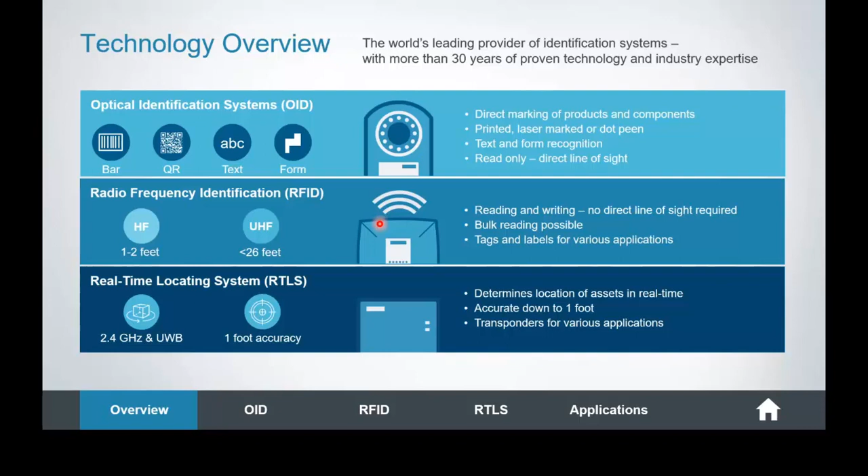And our new business that we'll talk more about tomorrow, we're going to do a separate session for this, is our RTLS business. So we have a real-time locating systems that we'll talk to you in a bit more detail tomorrow. But for today, let's dive into OID to start with.

So OID, we manufacture smart cameras. Okay, so our optical identification business is our smart cameras, which are out the box from the factory, predominantly barcode readers that would read linear barcodes right the way through to data matrix barcodes, to QR barcodes. Not only can we read black on white, high contrast printed codes on labels, but we also have the ability

to do DPM, so what we call direct part marking. So whether the component is laser etched or dot peened or chemi etched, whatever inkjet, whatever sort of marking method to obviously put a barcode down onto on a product, we have the ability to decode it straight from the MV500.

We have some software plugins which turns the reader into more than just a code reader. We have the option to do OCR, so some optical character recognition, and we have the option to do simplistic vision that we'll come on to talk about in a second.

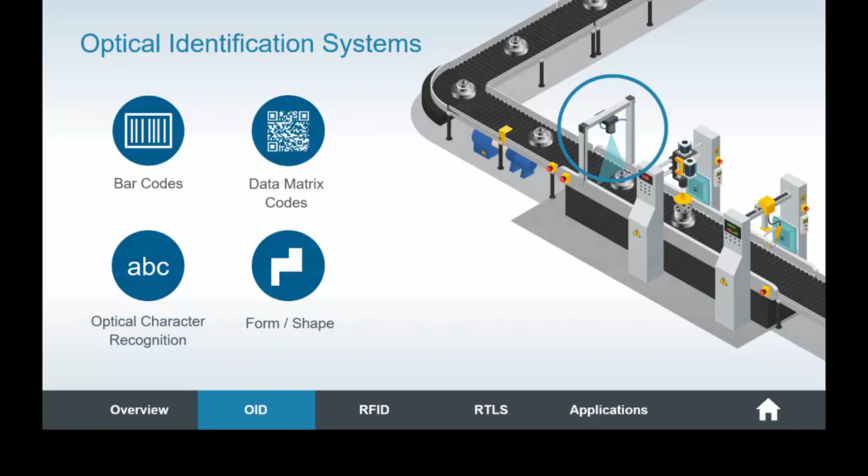So what are our software add-ons? So our software add-ons is Location Light, which is new. So this has been released this month. So we'll talk in a bit more detail about this, which comes now as part of the MV500 product. So at the factory, you get Location Light as well as a code reader, and it's our sort of entry-level simple object recognition that we'll show you a little bit more later.

Then we can obviously have a software license upgrade, so we can upgrade the camera to do Pat Genius, which is a full license for vision systems, for detection, positioning, counting, presence, absence, some what we call simplistic vision tasks. So I have to point out that we don't manufacture in-depth PC-based vision. You know, all of our vision systems are around the smart camera portfolio.

We have another software which is our Text Genius license. So this enables us to read black on white, high printed OCR on labels. This could be OCR A, OCR B fonts, black and white printed. We also have our Text Genius Plus license, which gives us the ability to train different fonts and special characters to potentially read inkjet codes on best before dates on pharma packaging, food and beverage packaging, etc. So different ways to print the code.

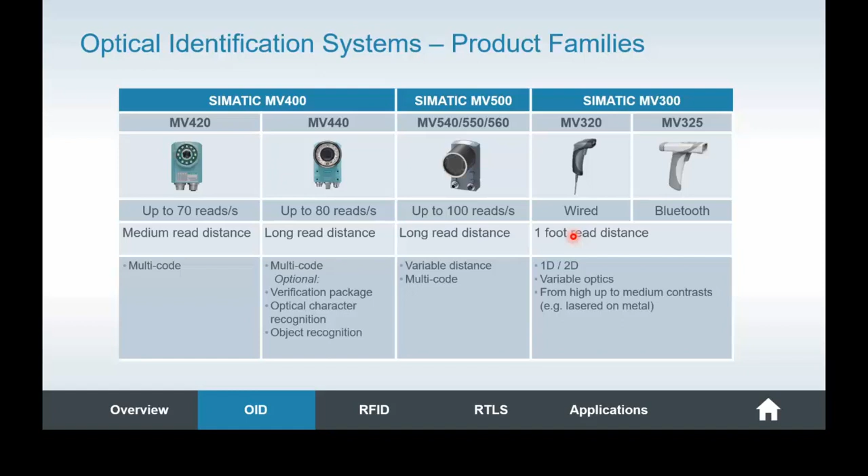We have an SD card in there for parameter saving, and we also have an easy setup button at the top, which enables you literally to plug the camera in, press the setup button on the top, and it will automatically set the camera up for the correct focus, the correct lighting, and you're up within seconds to start reading barcodes. You'll find that it's probably about 3 times the speed of what the 440 is. So it enables us to do high speed code reading in some logistics applications.

Our RFID business, our radio frequency identification business - quick, how does it work? Within RFID, we manufacture, like I said, 2 types, HF and UHF. They are passive RFID, so there's no battery involved. A quick explanation of how that works: we have a reader that literally sends energy out, the tag sees that, the tag gets quite excited, powers the tag, and then it sends its data back wirelessly to the reader. And we have multiple products for that.

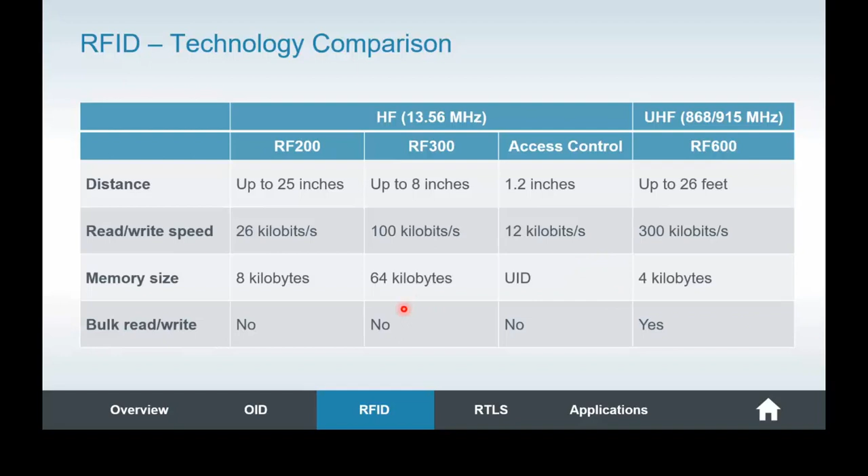The two products that we produce are 13.56 megahertz in the high frequency bandwidth and 868-915 megahertz in the UHF bandwidth. Some people may know we have our RF200 range, which is our entry level HF, which you would see again on automotive powertrains. We have our RF300, and we have our access control reader, which is our log-on reader. And obviously the UHF product is what we call our RF600. Again, some similar distinctions between the two: predominantly short read range on the HF to long read range on the 600. Lots of data in the tag within HF, not so much data in the tag of the 600. But again, multiple tags with RF600, predominantly one at a time on the HF portfolio.

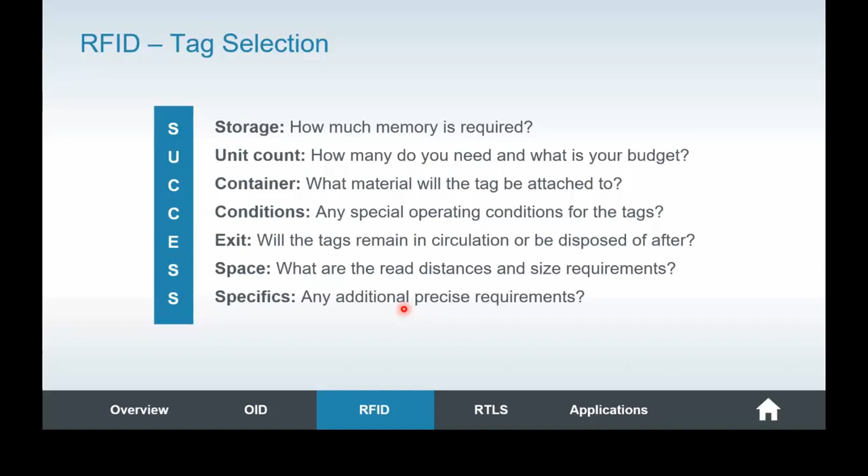If we answer these 7 questions, that would put us in a good position to spec the right RFID transponder, and give us a way of moving forward with a particular application.

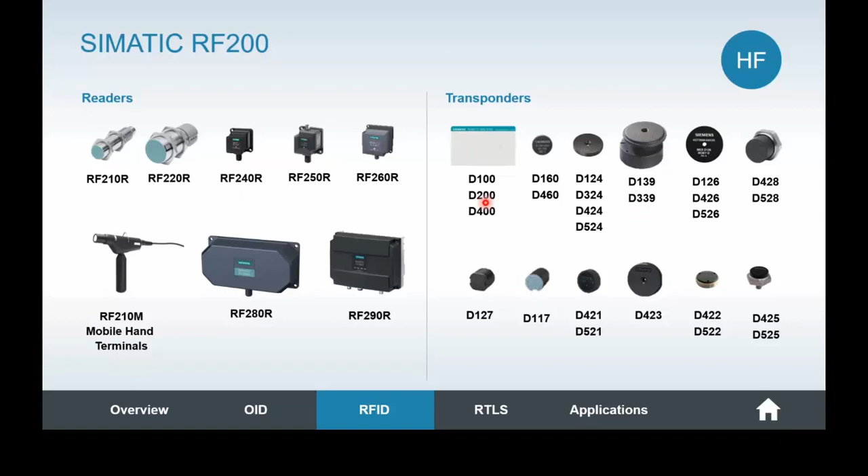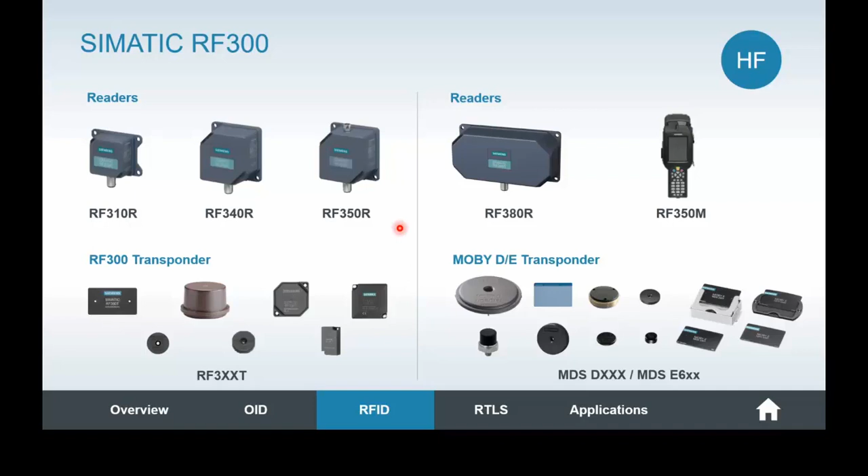On our RF300 range, again very similar, but you'll see we have a dedicated handheld for the RF300 readers. You'll see some different tags too - this is our high temperature tag for paint shops. There are some different compact readers, and for people who know the SIMATIC portfolio from years gone by, this is also known as our MOBY D or MOBY E transponders, still seen in the field today. That's our RF300 range.

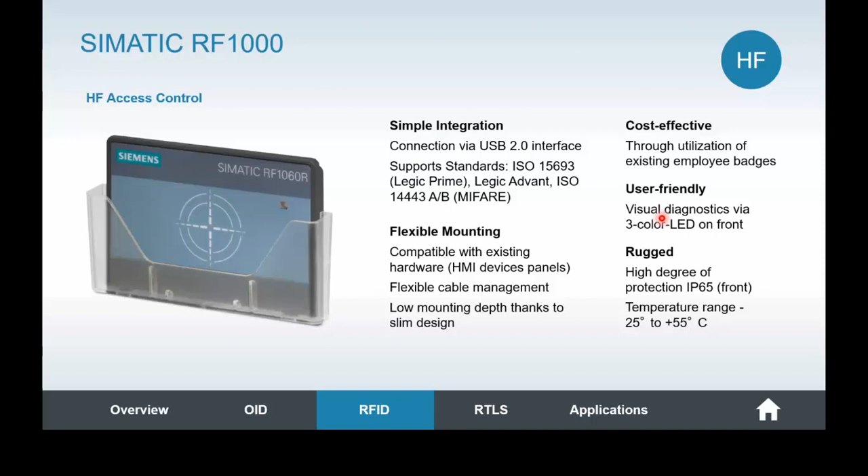So it's quite good in terms of customers could still have their existing employee badge that gets them onto site. They can use that card to log on to the HMI. I know there's some security issues now where people know each other's passwords, so it's a good option to use their existing employee card to log on to the HMI rather than needing to type in passwords.

So that's how the RF1000, an entry-level scanner, handles HMI log on access control. I'll turn over to Fergus now. Fergus will talk to us about how our ident products interface with our TIA portals and PLCs. So over to you, Fergus, on the TIA side.

Thanks very much, Lee. So yes, essentially integrating into TIA portal is obviously a massive priority for Siemens, getting everything into our totally integrated automation portal. And ident is no exception. It's actually been integrated into our control systems for a long time using a block called the ident profile block. But we now have a number of different wrappers for that block which make that interface far easier. We're going to show this in the demo.

Some of the devices can connect directly onto Profinet. So the RF600, for example, goes straight onto Profinet - drop it into your hardware configuration. There's an ident technology object which provides the interface for that reader, and then you can start communicating with it using some pre-built blocks. Some of the other devices, the cameras as well by the way, are straight onto Profinet too. Some of the other RFID readers have to go through a communications module. There's an absolute plethora of options for this depending on what sort of I/O you're using.

So we've got ET200 on the left. We've got our distributed ET200S or SP, ET200 Pro, which is more distributed and IP rated. We've got the S7-1200 form factor. On the right hand side we've got the RF160C, ASM456 if you want to go onto Profibus. All sorts of options for connecting into a TIA portal environment and interfacing with our controllers. And like I say, we'll go into a demo of that shortly.

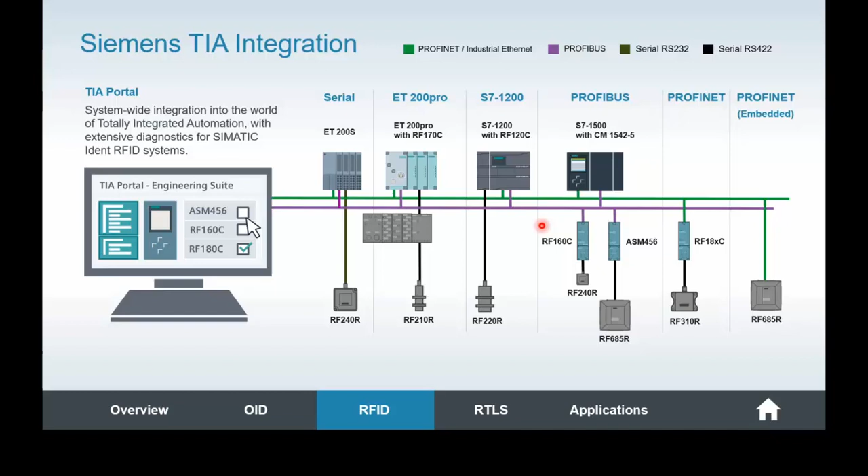Okay, cool. Thanks, Fergus. There you go. You sort of knew it was coming. I told you it was shortly. Yeah.

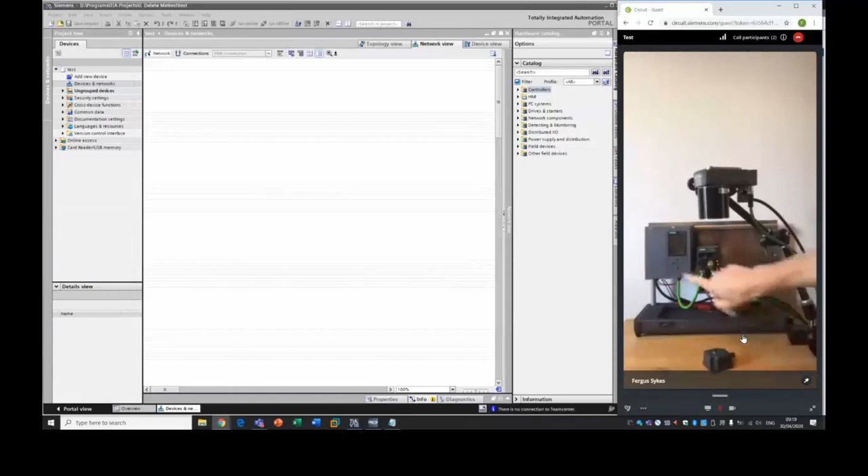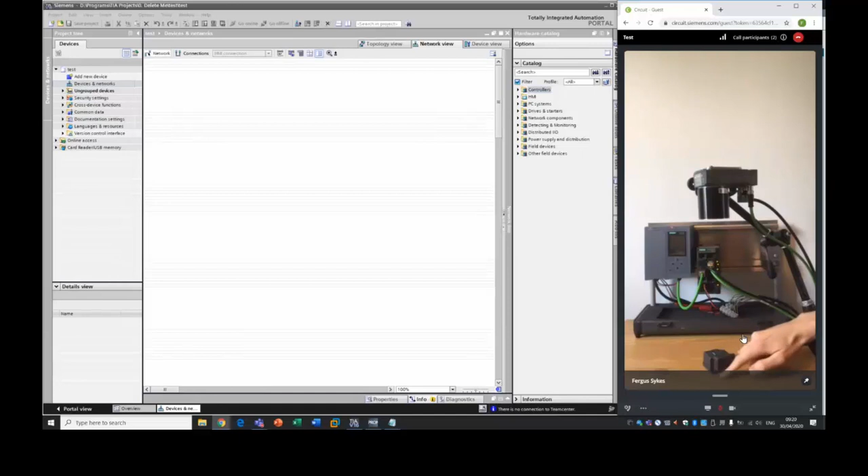So what we're going to do here today is connect our 1500 up to our MV500. So this is a 560U in this case. It's not required necessarily for this application, the U is a fairly high spec one - it's just I couldn't bring one of every single camera back to my home office, otherwise my girlfriend would be a little bit upset with all the boxes. We've also got a little RFID reader down at the bottom here, which we're going to be looking at with our camera, identifying the screw holes and passing the coordinates of those screw holes into our 1500.

So I will just spin back round. Okay, let's add in our 1500. I'm going to pick an unspecified CPU in this case and do the detect, because I can't remember the exact part number of my CPU, and why bother going to the effort if the software can do it for me. That's the power of integrated software systems, I guess.

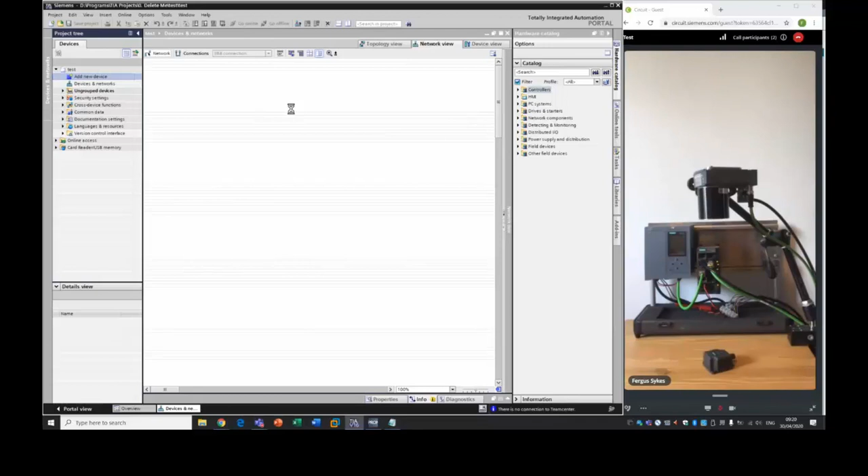Here we go, so this loads up. I'll do detect. Fingers crossed - I have tested this multiple times over the last couple of days, but you never know with live demos. Start search. Found our device. I'm just going to detect that 1500 and bring it into the project.

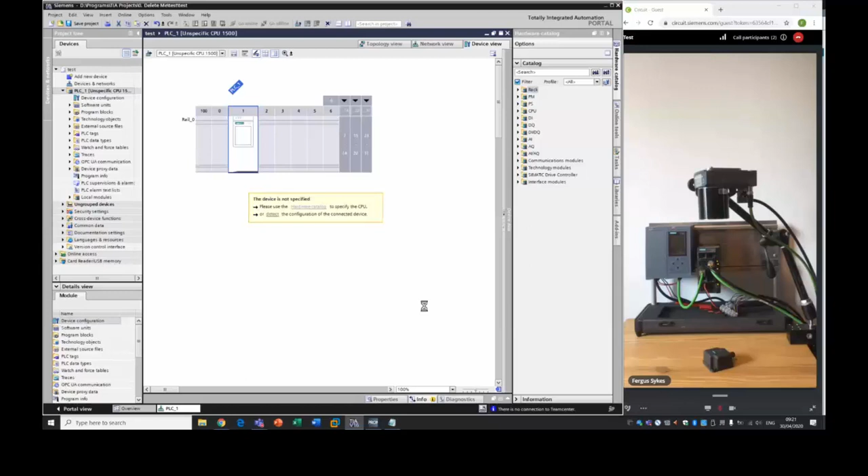You can also do this with I/O, for example like ET200SP racks, using the hardware detection. But for our camera, I'm going to go into detecting and monitoring in the hardware catalog and our Simatic optical identification systems.

You can see there we've got a representative for each of the families, and I'm going to drop in my MV500 here. Currently there's no firmware differences available. There is actually a firmware release that updates for the locator light, which we're going to be looking at, which is a no-cost option, but this older firmware version GSD file is going to work just fine for us for the moment.

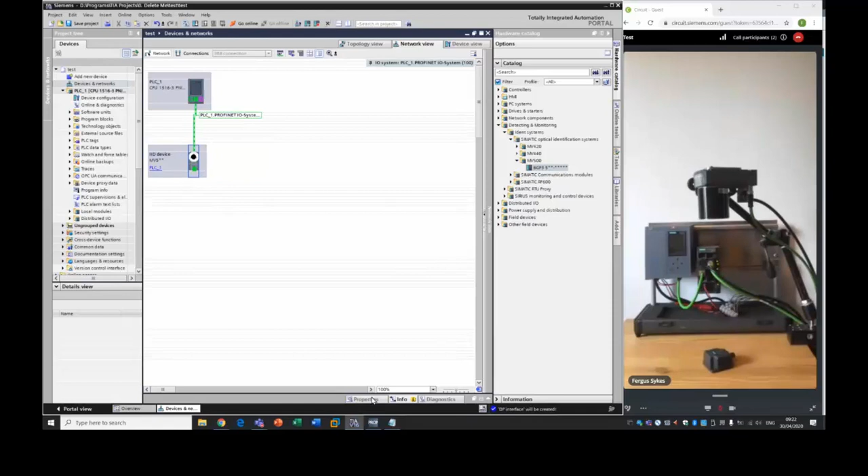So I'm just going to go into the properties quickly. There's a few different options in here, but the only one I'm really concerned with is this operating mode. So FB79 and ident profile are two different ways of communicating with the camera. We don't really need to go into the depth, but for the technology object, which I would always advise you use if you're just doing a simple quick setup, we want the ident profile.

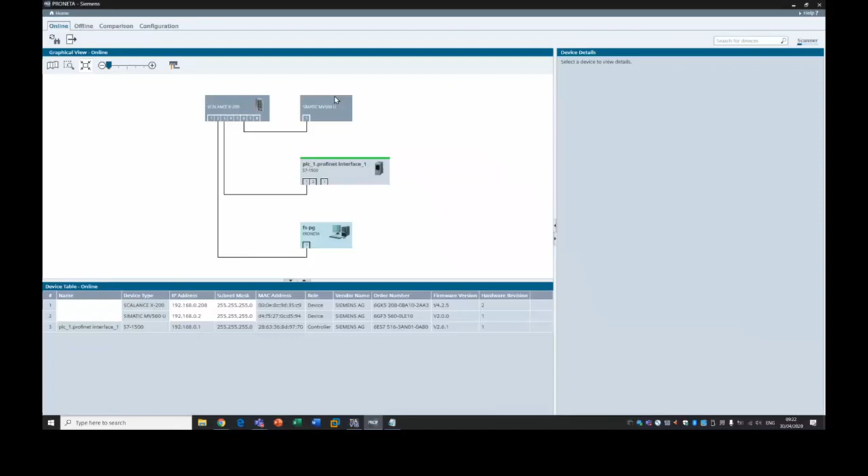My IP address here is going to be 0.2, and the IP of my controller is 0.1, which I have already preset with PRONETA ahead of time, just to speed that up a little bit. But what I do need to just do is assign my device name.

Apologies if I'm going a little bit quickly. I just want to make sure that we get everything into this demo, and we don't want to keep you here for too long. I'm sure everybody needs to go and tend to children and dogs and things like that.

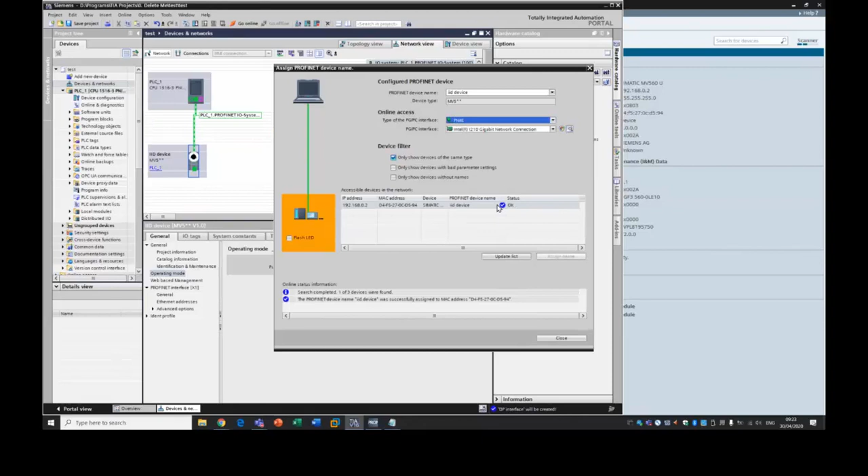So I'll just assign the device name. There we go. And I'm just going to download the hardware configuration to the controller for now, so that once we've got that hardware downloaded, it can go out looking on its Profinet network, find the device name that we've just assigned, and connect up with the MV500.

And we've got more stable lights now on our 1500. I'll just finish loading that. Let's turn the screen back on. There we go, downloading process. And let's start the module. And there you go, we've got a nice green banner.

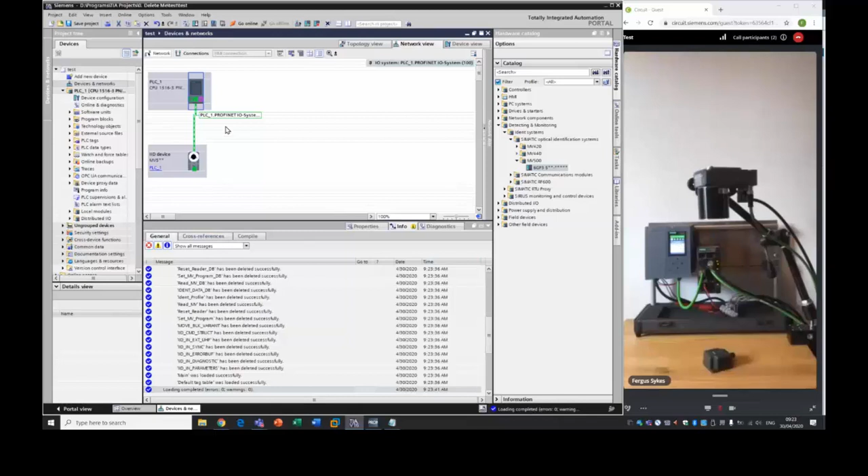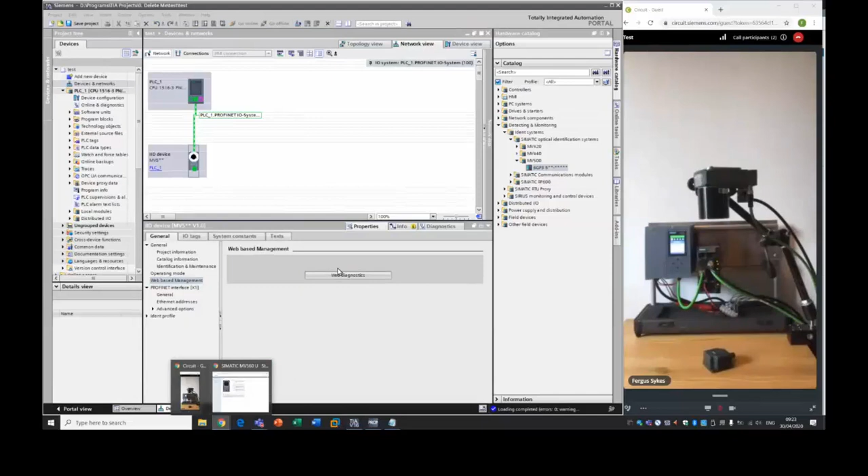Okay, so what we're now going to go into is the camera software. We can do that from here. We can just type in an IP address into any web browser. This is essentially a link for the web browser, the IP address that we've specified, and that will bring you to this page. So I've already loaded this up prior, so there you go, there's our IP address up there.

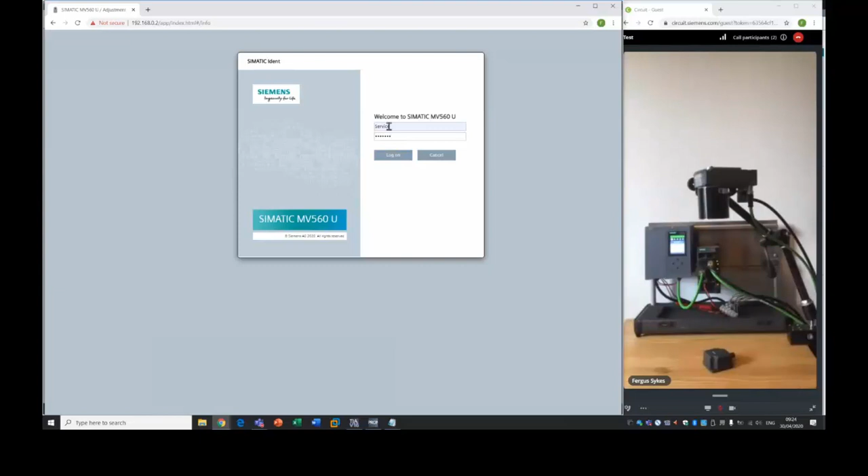To go into the main home page, I'm going to click on our camera, and I'm going to log on. As with everything in the world that we currently live in, security is a priority. The default password, I'm going to log in with service, is just service, but you can of course change all of that, and if you log in with admin, you will be forced to change the password to increase that security.

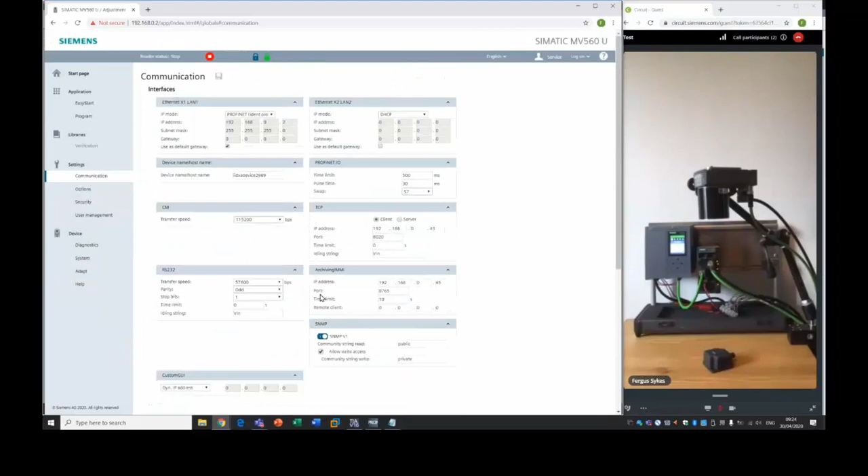First thing that we're going to do here, if we go to communication, you can see we've got Profinet ident profile selected up there, and I'm just going to change our trigger source to Profinet IO so that we're looking for a Profinet trigger, and then all of our results are also going to be via Profinet IO. I'm going to save that up here. There's all sorts of different options for communication, as you can see. We're not going to go into everything today, we just don't have time, unfortunately.

But you want to see the interesting bit. Now, apologies if anybody's sensitive to flashing lights, but this on the right-hand side will be flashing a little bit while I'm on the auto trigger mode. So, takes us to this screen.

We've got a basic program input into here. The first step of which is always image acquisition. Then we've got a decoder step, which we don't actually need in this case because we're going to do location. And then we've got our result, which is the output.

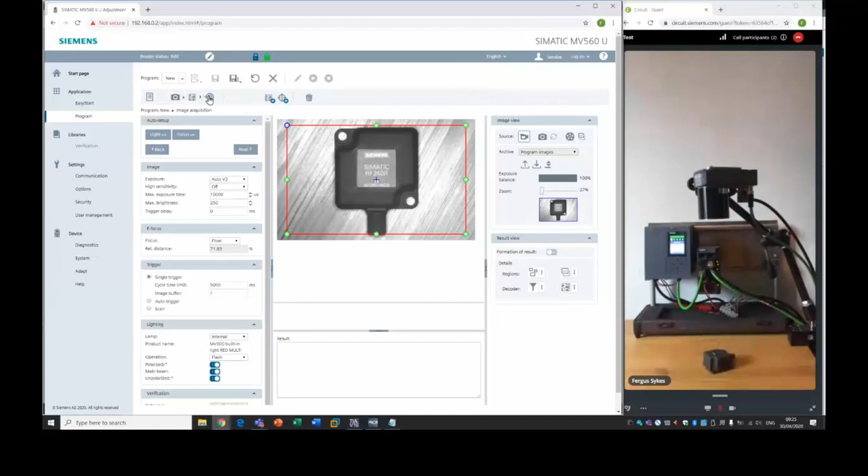So for now, I'm going to just remove that decoder step, drag it to the bin, and I'm going to drag in a locator step to the middle. The reason that these are drag and droppable is because you can have multiple steps of different types. So you can use, for example, a locator step to find a label within an image and then decode on that label, which could result in reduced decode times compared to just scanning an entire image for barcodes. Or you could have multiple locator steps if you wanted to, multiple decode steps, whatever you'd like to do.

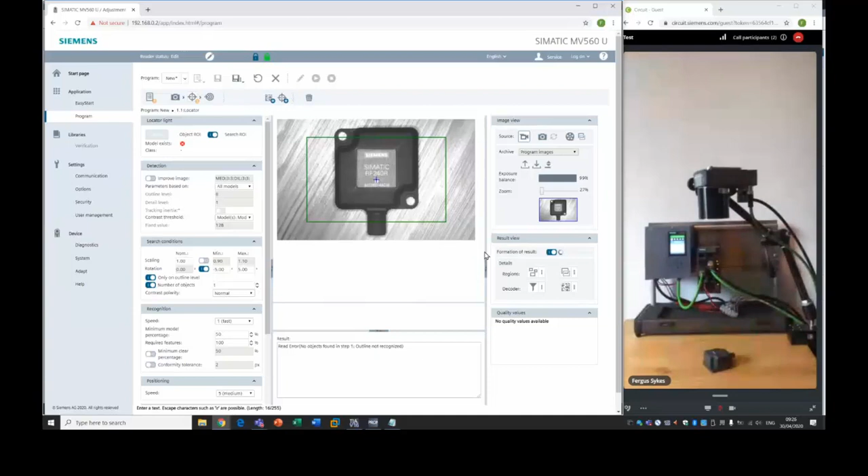So what are we going to do? In this step, our objective, I'm just going to zoom in here a little bit, is to find, as you can see on our Simatic RF240R that we have here, we want to find these screw holes.

So what I'm going to do first is create a model. We flick this over to Object ROI, and we get this little box here. Wherever you see this box in any of these screens, it's known as an ROI, or region of interest.

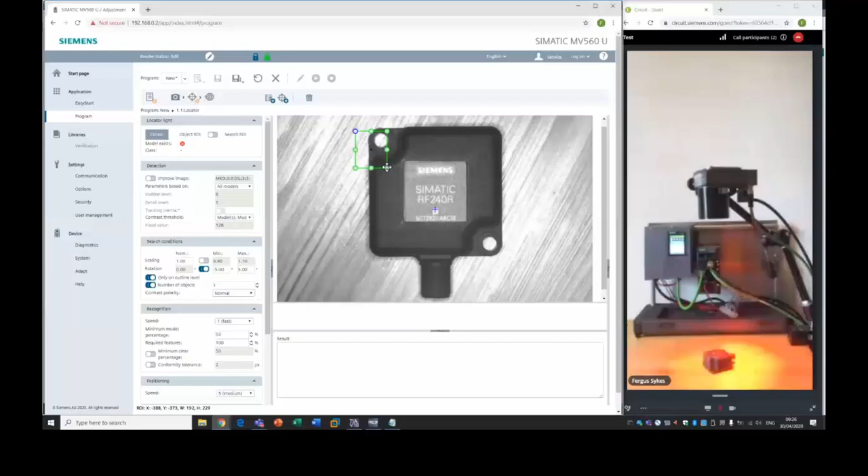Now, the region of interest can be increased or decreased. If you're doing something like code reading, you could have it as the entire screen, but if you left it as the entire screen, you'd probably end up taking far too long to find your code. Generally speaking, you want to adjust it as narrow as you can so that the camera doesn't have to look at every single pixel on the screen.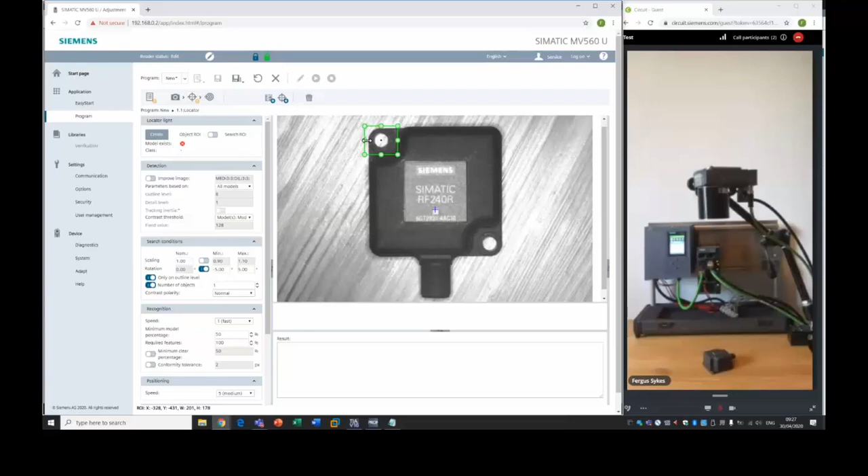And I'm going to be looking for this little screw hole up here. I'm going to try and get that dot as central as possible. There we go, that'll do. So I'll just bring this in actually a little bit.

That looks pretty good to our human eyes, but what we can see in the background here, this is on a wooden table, and we've got a lot of interference in the background. Lots of different lines, lots of different edges, effectively, of contrast difference, which is what the camera's looking at. And the more complicated the image, the longer it'll take and the more tricky it'll be for the camera.

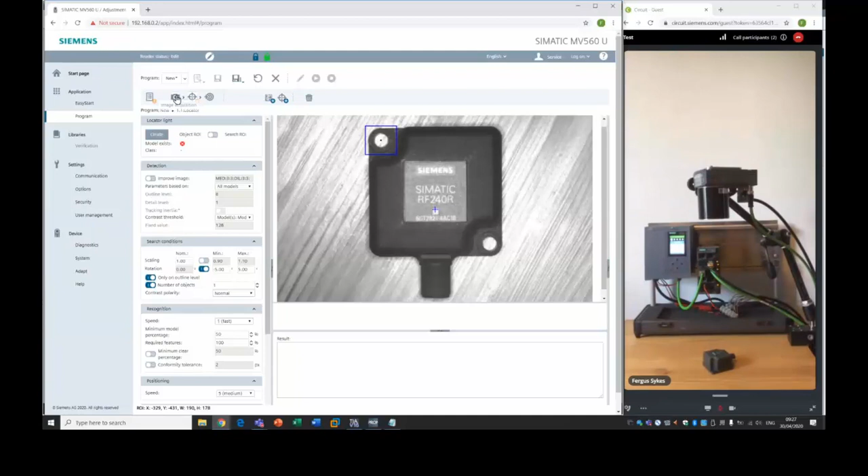So what we're going to do, first of all, is go into our image acquisition and play around with our capture. So at the moment, we've got the exposure on auto. Every time it takes a picture, it's actually taking multiple pictures and adjusting the exposure time and brightness accordingly. We're actually going to put it in manual for the moment.

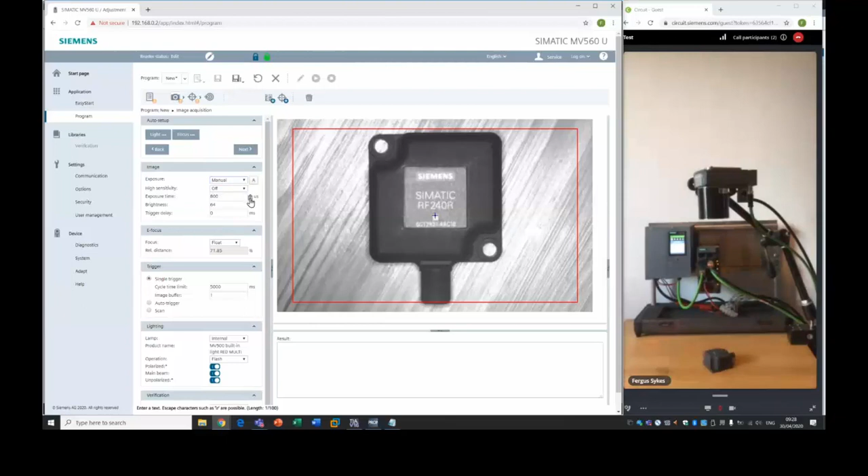And it's just taken the details from the last image that it took. We can adjust this as we please. So you can see if I turn the exposure time down, we start to get darker. Exposure time is literally the amount of time that the sensor is exposed to light. So the longer it's exposed, the more light it absorbs.

And I happen to know that 1800 is a good value for this, along with 100 for our brightness, which is sort of an artificial gain value in a way. Now this image looks really blown out. To our human eye that looks rubbish, but actually from the camera's point of view, all it's interested in is these objects up here, and now we have a nice crisp edge against a plain white background, much easier to find.

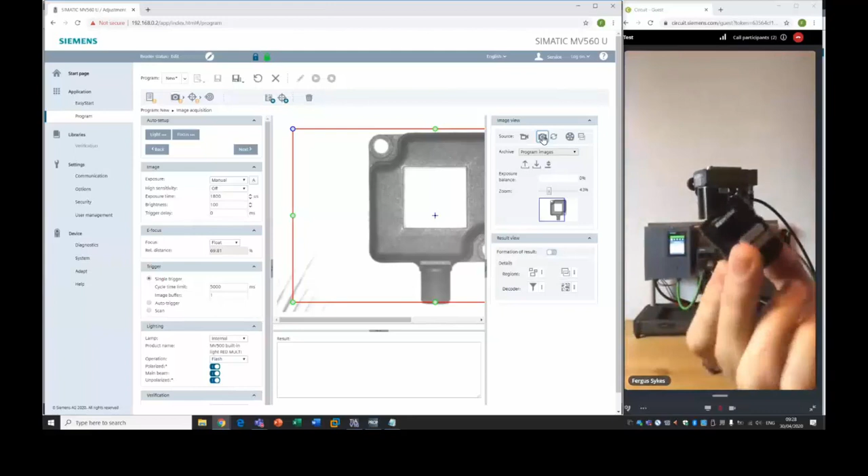What we have down here as well, you can see, is our e-focus. So I'll just stop this flashing for a moment and show you something quickly. So in front of the camera now, you should see we have a little lens. This is one of our fixed lenses that could be on this camera. Normally you would adjust your focus with this ring on the end and your aperture with this ring lower down. We don't have to do that in this case because we have an e-focus lens.

So if you look at the image that we have here, I'll actually just put this back onto auto so that you can see the text. And if I go into manual, I just need to put that back to trigger. So we can read this text at the moment. I can now change the focus with this value, and you see that changes there.

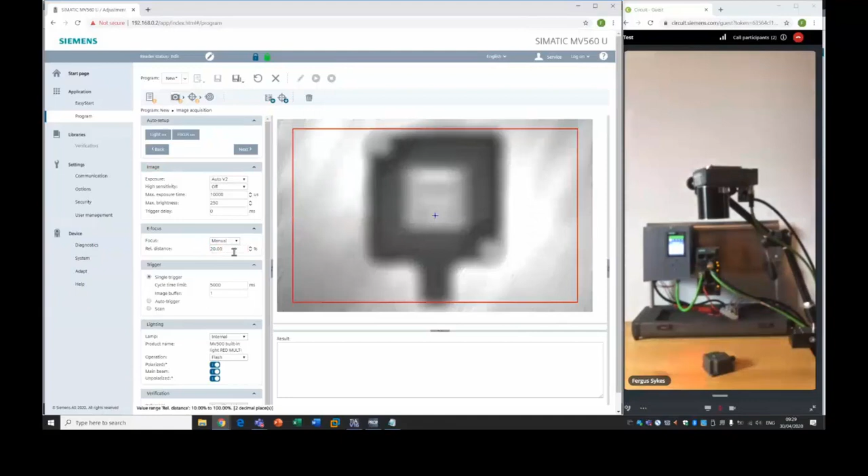I don't need to worry about that at the moment, and in fact for object recognition sometimes defocusing is actually better because it simplifies the image again, just like we've done with our exposure. But I'm just going to leave that as is for now.

The beauty of this, by the way, is that you can leave it set up with different focuses for different programs. So say you have different products coming down your line, which are different heights, for example. Those products could all be scanned, and when that program is loaded in, you can have up to 16 programs, I believe. Once that program's loaded in, the focus will be set appropriately for that object.

We also have lighting options down here. In this case, we just have a standard unpolarized light. But if we had a filter on the end of this, we could actually have a polarized beam, an unpolarized beam, and a main beam. And we can, again, select different lights for different capture stages. The camera can then dynamically adjust itself as we go through the program. Perhaps if we've got variable lighting conditions in the environment, we can adjust for that by taking multiple pictures with different lighting, different exposures, different focus.

Okay, sorry, just having a drink.

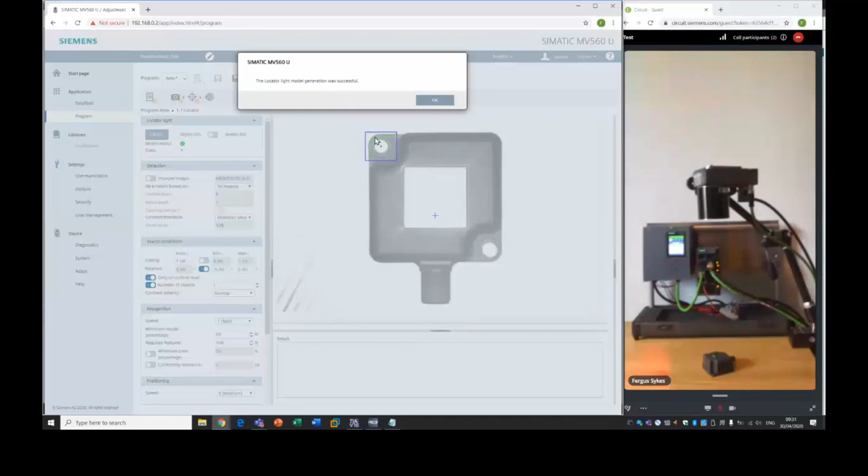Okay, so now that we've got a more simple image, let's create our model. You can see there we've highlighted those lines, so the locator has identified these edges and saved those as a model.

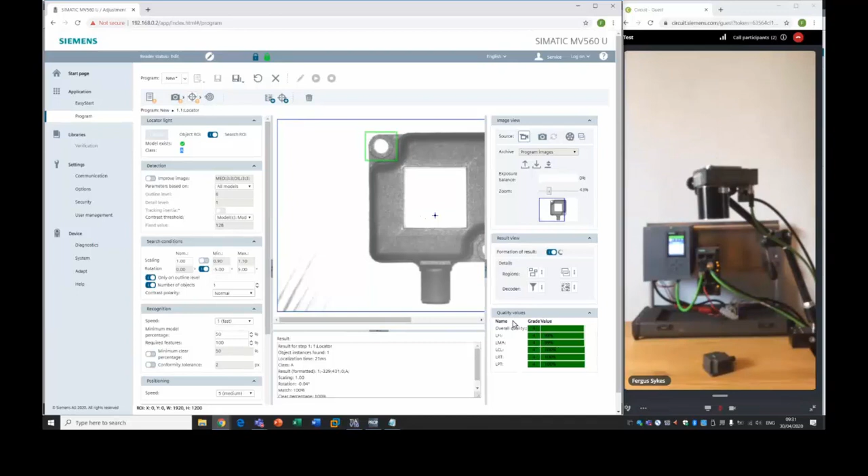I'm going to swap over to the search ROI now, and make this our entire screen. What I'm going to do straight away is run this. There we go, we've found that. So we're continually taking images at the moment, and we found our screw hole. You can see as I move this around, we can track it around the image.

What I'm now going to do is set this up so that we can find the other hole as well. So if we go for number of objects 2, I'm going to allow a little bit of scale difference from the object we trained it with. And of course, because it's upside down, we need to allow some rotation, in this case 360 degrees of rotation.

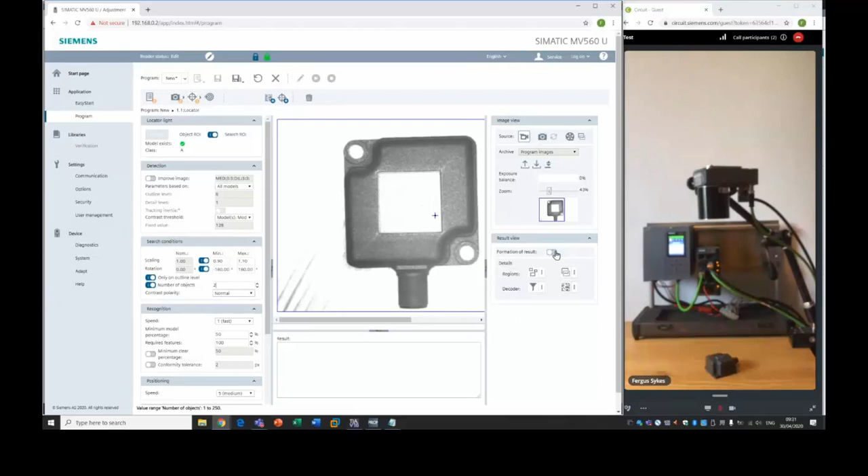If we now go back, there we go, we found both holes. So you can see, as we move around, we're tracking both of those screw holes, and we're actually getting the coordinates down here. Now this doesn't look like much at the moment, but all shall be explained.

So we have what we call the format text here. I'm just going to quickly format this a little bit. I won't go into too much detail because there's all sorts of things we can define here, but essentially this is the string that will be sent to our PLC. That's all you need to know — that's the string we're looking at that will actually be sent to the PLC.

And with all of these setups, by the way, in essence your PLC will always get an array of bytes, and then you can do with it as you please. That makes the interface much, much simpler. If you're connecting to a PC system, you can now also retrieve the images as well as diagnostics logs and things like that if you want them.

So for the format here, I'm just going to put some extra characters in that are going to make sure our format is always 4 digits long. I'm going to delete the rest of this bit, and I'm just going to add in some dividers. I'm going to call that Y, and I'm going to call this X. There we go — so you can now see in our format, we've got X 348, Y minus 351, X 271.

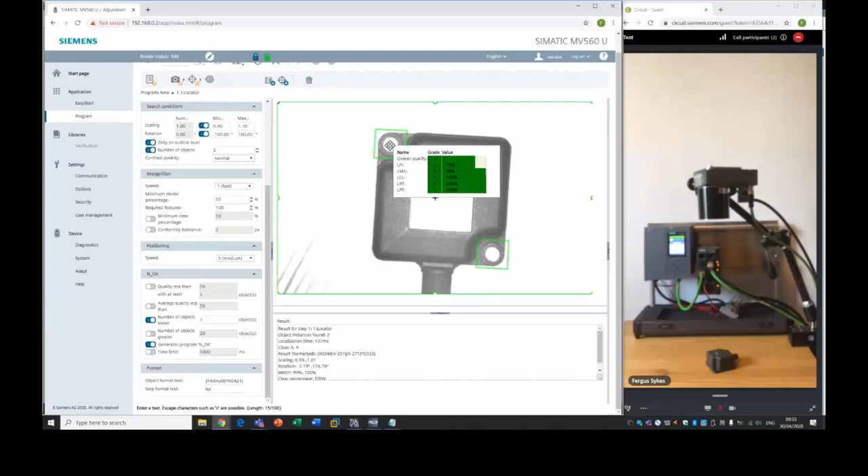And Y 333. Those values don't seem to make much sense really at the moment, but essentially those are in reference to our center point. So you can see the center point here, the black dot — the center point of our region of interest that we defined in the model, which is why I was so careful with getting that dot right in the center of our screw hole. That is the reference, that is what we're referencing to this center point.

So the coordinates are that central point of the model referenced against this center point, which is why some of them are negative. We do get some other information in here at the moment, but we're not too bothered about rotation because it's a hole — we don't really need to know what the rotation of it is. We just need to know there's 2 and we need to know where they are.

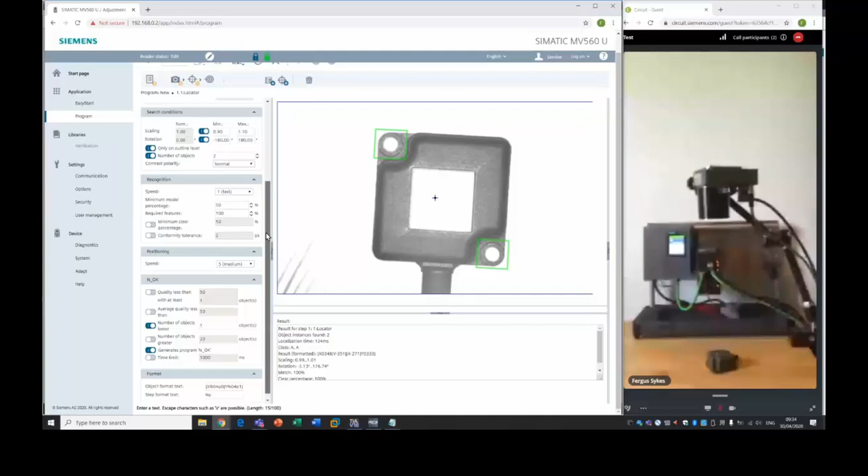So that's essentially it for our model. We've created that. We don't want to change anything in the results step at this moment in time, so we're just going to save our program. I will just save this as screw hole find. Save program.

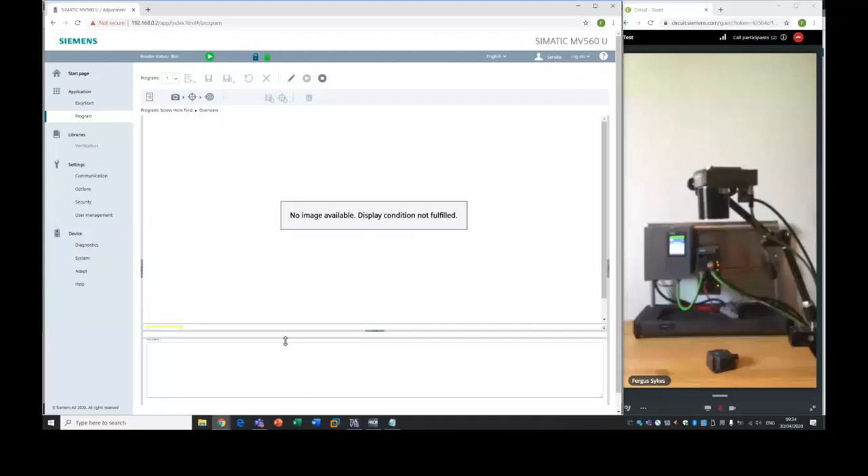Okay, and collapse that, and I'm going to go into play. So at the moment we're on single trigger mode, which is the default, so we haven't actually got anything to look at the moment. So I'm just going to log off now, and we're going to go back to TIA Portal.

So how do we actually control the camera? The technology objects that I was talking about before, here they are. So we've got motion control, which a lot of people will be familiar with, PID, counting and measurement. We also have SIMATIC Ident.

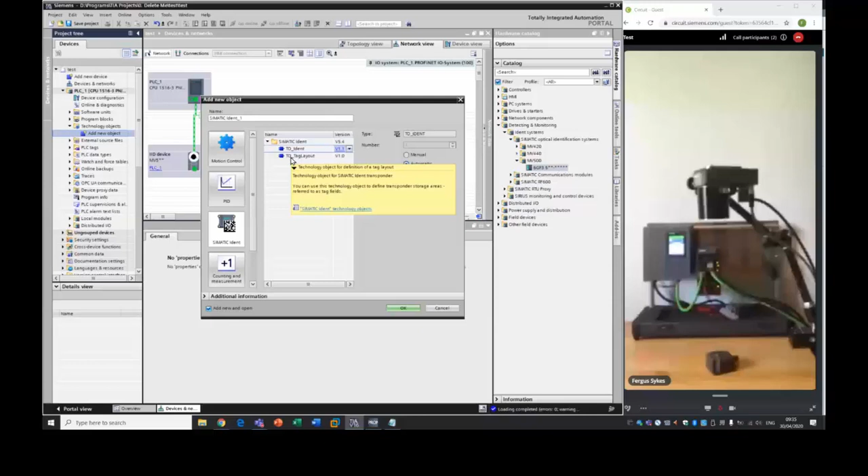TO tag layout is something that is still slightly in development, but this will provide essentially custom, easy to use tag layouts for putting user data onto RFID tags, which is a really nice feature. Just makes the data handling a lot easier. But we're just going to use TO_ident for connecting up our camera.

If I put one of these into our project, and as we do if we're selecting a drive in a motion object, we just go into our devices, distributed I/O, ident profile, and tick that. That's all there really is to do in this technology object. We can, if we like, define it so that when we issue a reset command, it always selects one of the programs. We're not going to do that for the moment. I'm just going to leave that as is and go straight into my main OB.

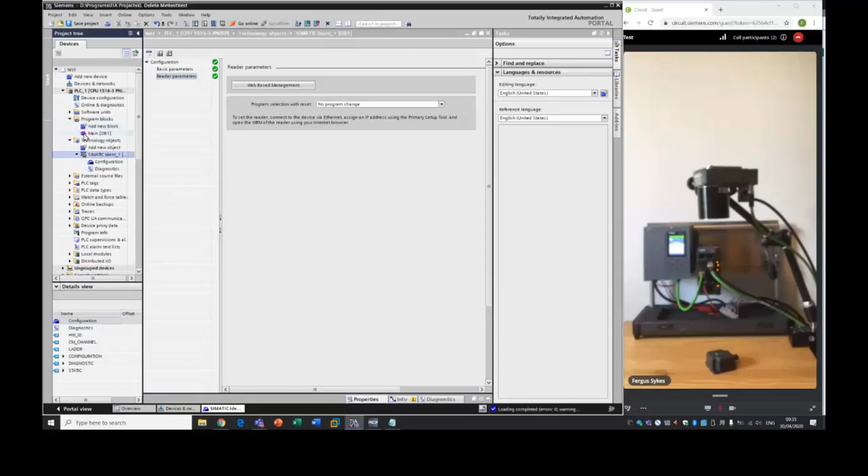So what are these blocks I've been talking about? If we go down into our optional packages, which is a lovely new folder we've got now with all sorts of goodies in there, we also have SIMATIC Ident. Now there's loads and loads of blocks in here depending on what objects you're using. So we've got RF600s, 300s, we've got camera stuff, advanced blocks. We don't need any of that in this instance.

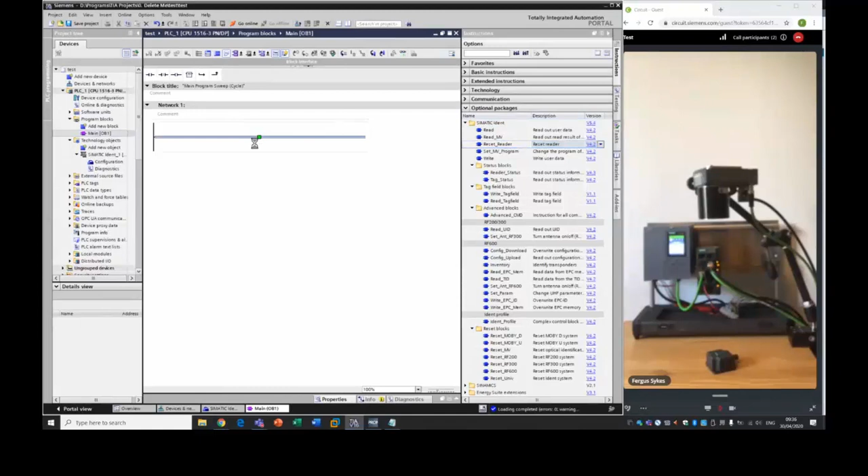All we're going to use is a reset reader, which, as it says in the name, is used for resetting, acknowledging faults, that sort of thing. We're going to get a set program, so this is how you'd choose which program within the camera that you want to run at any time. And we're going to get a read MV. Drop those in, I'll just minimize that.

Okay, we're then going to drop our SIMATIC Ident technology object onto our hardware connect pins. And it's as simple as that for addressing it. There's no more faffing around with hardware numbers, hardware IDs. We don't have to deal with the comms at all. It's as simple as that, dragging and dropping the technology object onto the block.

The only thing left now is to create a data block for our data to be stored in. So I'm going to create a new DB here. I'm by no means showing best programming practices, by the way. This is just a simple setup, so please don't judge my programming skills.

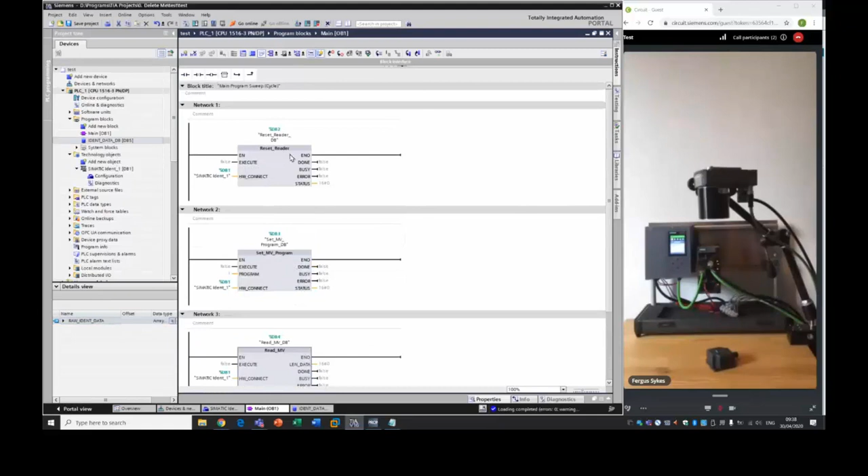I am going to create an array here for our data. Doesn't really matter how big it is, it just needs to be big enough for the data that's coming back. And as I said before, it's just an array of bytes. So there we go, we've got 500 bytes in our array. Come back into our program. I'm going to highlight our data block, and in the details view, I'm going to drag the array, not the data block, the whole array onto our ident data pin. And that is literally all we need to do to start getting data back from the camera.

Thanks very much, everyone. I said, no, obviously I'm going to actually show you it working. I'm not going to cop out there. I'm just going to pray that my live demo actually works. Here we go, let's download our program.

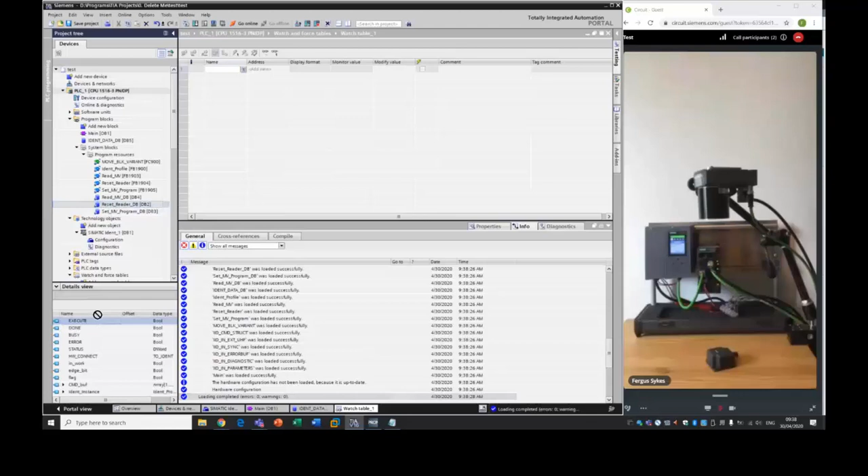And I've opened up a watch table here. I'm going to quickly drag in our executes. So if I go into program resources, reset reader, and we'll go execute and set MV, we want the execute for that as well. And read, I'll get the execute for that as well. Expand those out a little bit.

And then I'm going to use the split window function and open up our data block below so that we can see the data when it arrives. So let's go online. And you can see we've currently got nothing in our data block. And if we go online here, everything's happy and healthy. We're connected up, we just need to try and trigger the camera.

So I'm going to do a quick reset. I'm going to set our program as 1. And fingers crossed, there we go. We have data into our PLC straight away.

Now, I'm going to say that you're probably not going to believe me that this is actually the correct data, because that looks nothing like what we were actually looking at previously in the camera software. I'm just going to do a little bit of data manipulation using some code that I've written previously so that you don't have to watch me do it all. Excuse my little cheat sheet here.

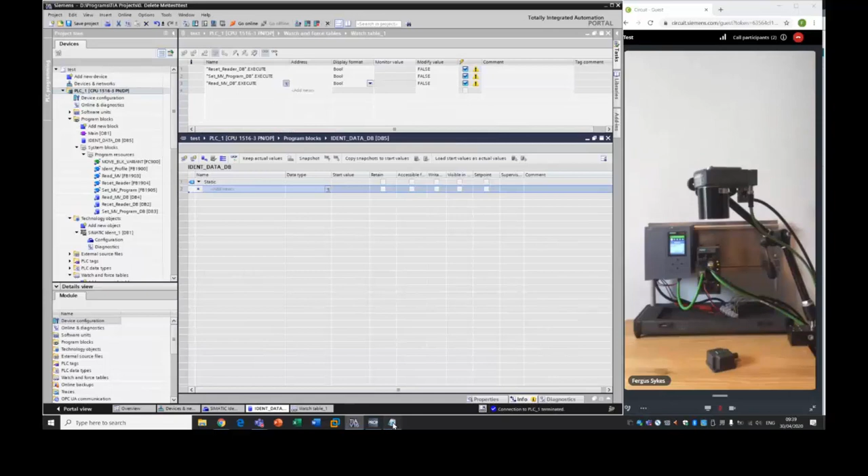I'm just going to quickly drop in all this data. Just grab that one as well. Come on, why is that one not dropping in?

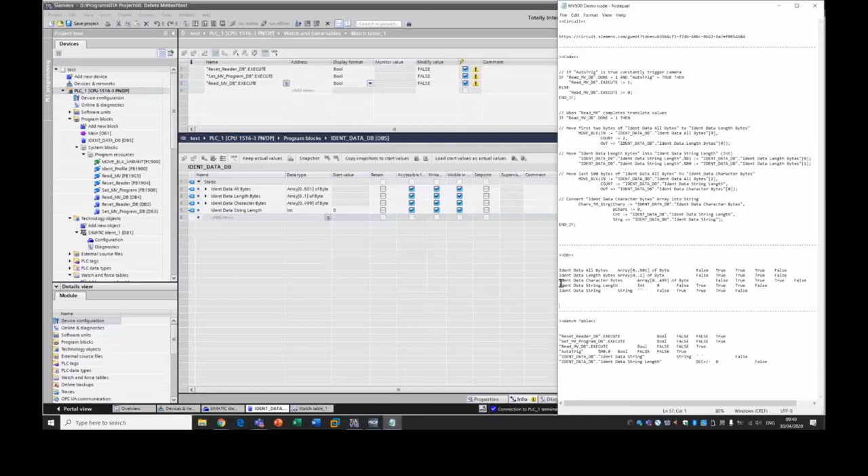Okay, got my string in there. And then I'm going to go into my main OB and just drop in a little bit of SCL code, which is going to turn our data into something that we might recognize. You don't have to do this. It entirely depends what you want to do with the data you're being sent. You may not want to manipulate it at all, you may want to keep it in those segregated bytes. But just so that we've got something that looks more human readable, I'm going to convert it for us.

So this is a little routine that will allow us to auto trigger as fast as possible once we get this set up. This routine simply looks at the string. The first 2 bytes are the length of the string, so we're going to find that length. Then we're going to move all our bytes and convert them with a chars to string block. So this is the block that's doing the conversion, and we're going to tell it how long the string is and then convert it over.

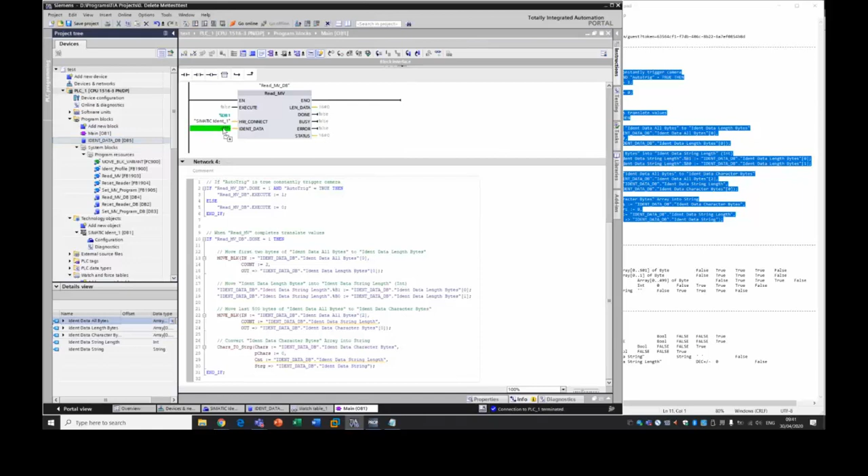So I'm just going to define this tag. Again, not programming best practice here, I'm just trying to show a simple example. And we obviously need to change the ident data connection here. Ident data, all bytes, I'll put that on there. And that's our code done.

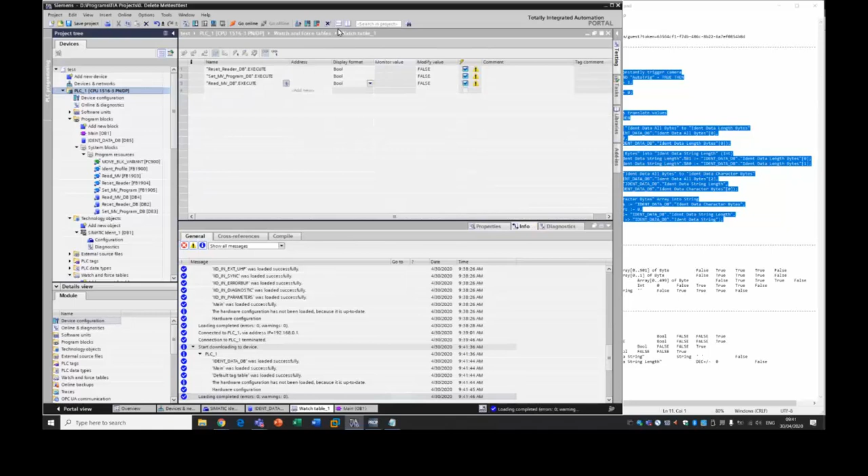Now I'll just go into, download it first, and then I'll just go into the watch table and add in the new elements. Reinitialize our data block because we've changed all of its contents. Minimize that, here's our watch table. I'm just going to delete those out. And if we just delete all that, I'll pull in these elements.

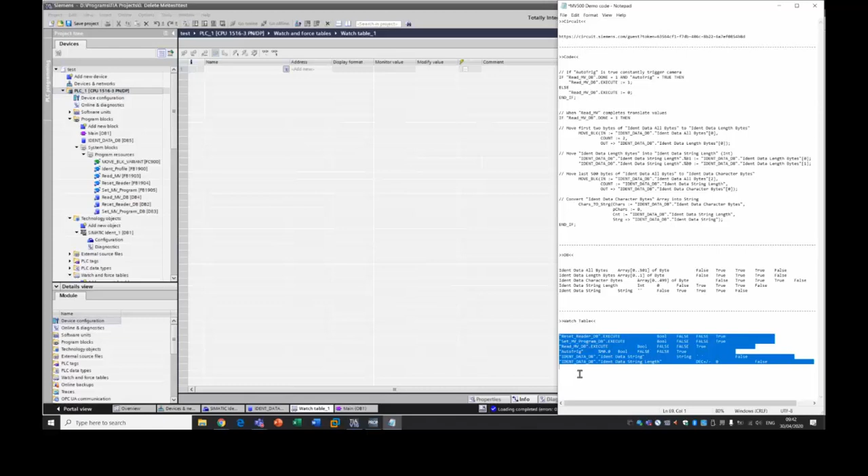This is the bottom one. So I'm just going to expand these out a little bit so that we can see it. Okay, let's go online.

And go to play. Bring the camera view back up here. So there we go, everything's off at the moment, we currently don't have a string. Sorry about that, my headset just turned itself off. We're back. Okay, so we're going to execute our reset program set, which we don't really need to do because we've already done it. And we're going to take an image, and there is our readable text.

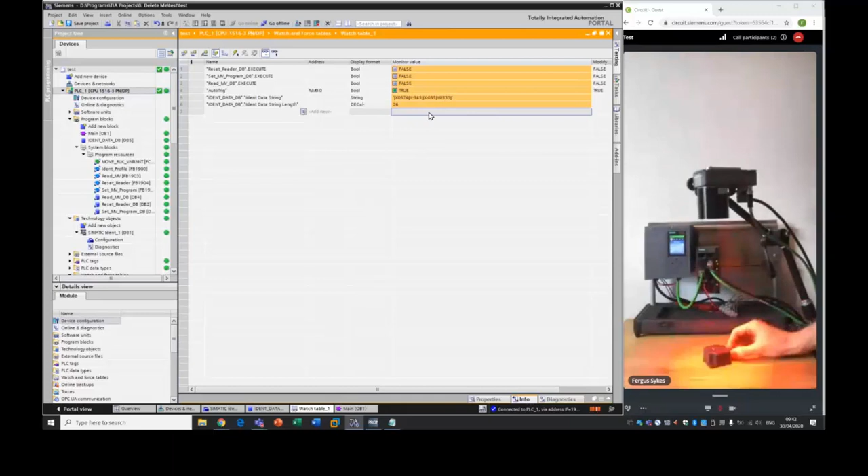And what we'll also do now, we'll put the auto trigger on so that it's constantly pulsing. And as you can see, as I move this around, we've now got our X and Y coordinates for both of those screw holes in the camera, in the PLC.

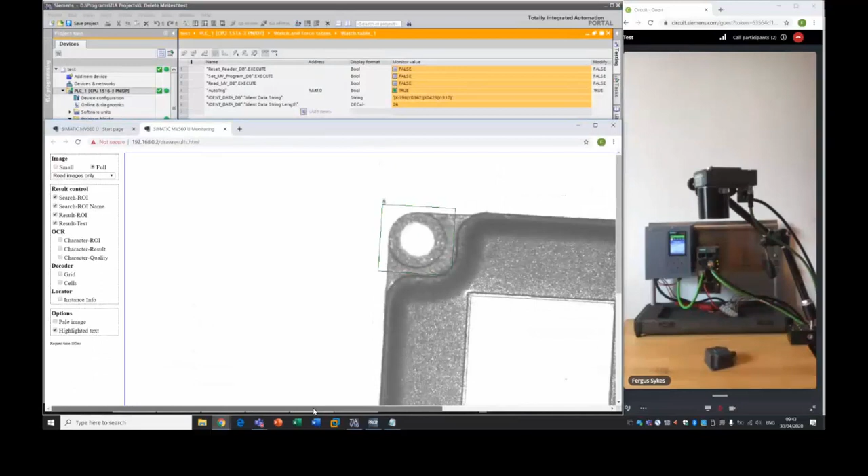Just to show you what that looks like from the camera's point of view as well, we have these web pages here which don't require any sort of access to the camera, so we're not disturbing it too much. I'm just going to bring that down here, move that across a little bit, and there you go - you can see our two screw holes there. And now there you go, you've got three different views: you've got the live view, you've got the camera, and you've got the coordinates within the PLC itself.

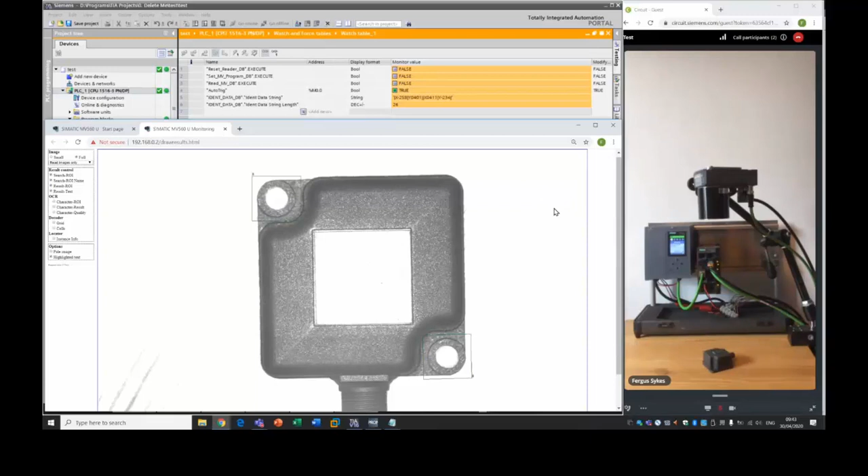Okay, so hopefully, yeah, Fergus showed you there basically our new Simatic MV500 product. It's been a long time coming for us, but now we have a product which we believe is best in class - high performance, dual core processor. So some features there: the one button setup at the top that you can see, the SD card, the lighting, the liquid lens, the e-focus lens. As Fergus pointed out, we have obviously PoE now from the camera.

And just to give you a quick idea, this is the entry-level 540, that you'll see with Power I/O connector and a high-speed Ethernet port. The 550 range adds a second high-speed Ethernet port, which is quite a good USP for us as Siemens, because if we're using the Ethernet port to communicate with the PLC over Profinet, we may want to use the second high-speed Ethernet port for failed images. So we might want to have a look at the failed images.

And our 560 has literally just been released in the last week or so. Our 560X is our logistics camera, so that allows us to look at high speed code reading on sortations, aircraft baggage, etc. So we have a logistics camera.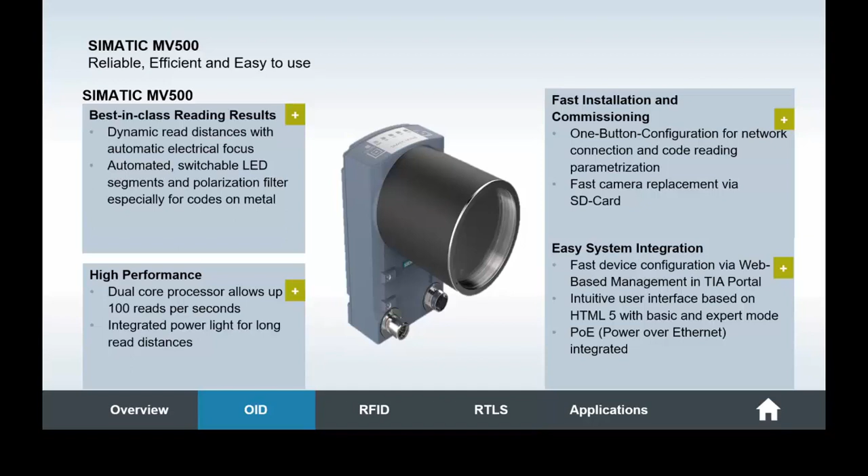And so a 540 entry level with location light, 550 extra high-speed Ethernet port, 560 our logistics reader.

As Fergus said, we're going to take a quick spin now, the last couple of minutes, through some particular applications, and then we'll wrap up and take some questions.

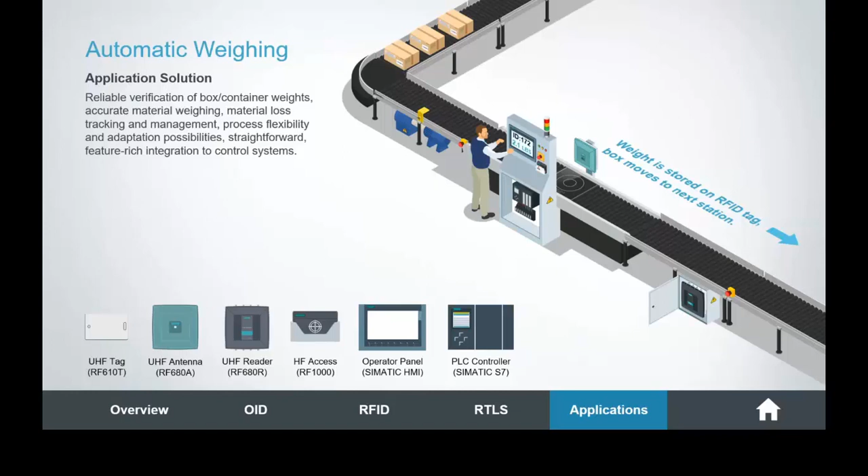Here's an application for automatic weighing for a customer. You'll see the RF1000 for the operators logged onto the HMI, a HMI panel, and a PLC. The box comes into the station, we weigh the weight of the box, write the information to the RFID tag on the label, and it moves along to the next station. It's a particular application that we do quite a lot of.

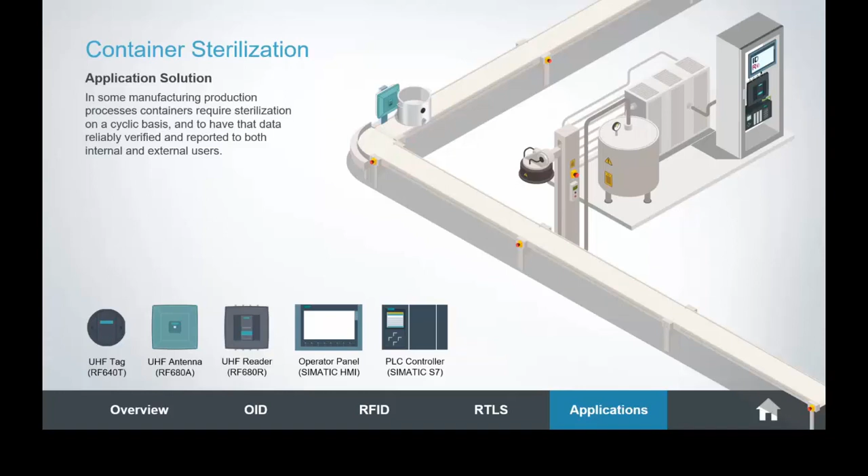This is a pharmaceutical company that wants to track their vessels for sterilization. We have an RFID transponder on the vessel. It comes into the station, we read the RFID tag, send it on its way, and it gets sterilized. Next vessel comes in, we read the RFID tag again, find out it's already been sterilized, and then we can send it back. So we don't need to do that - that's a live application.

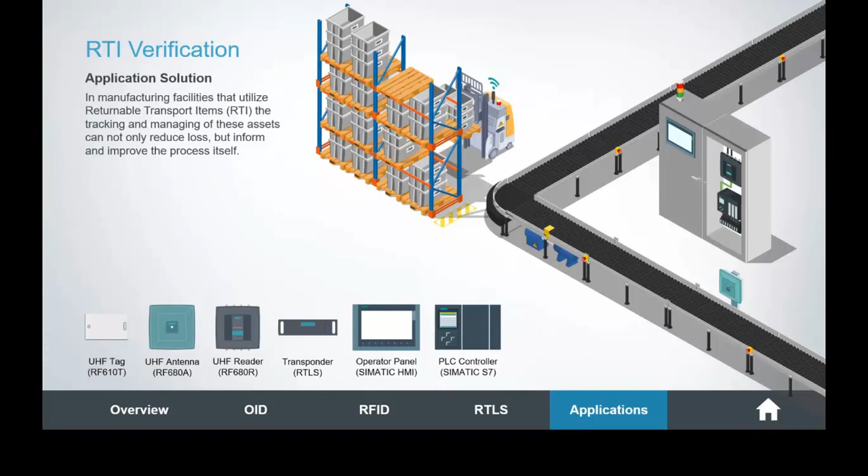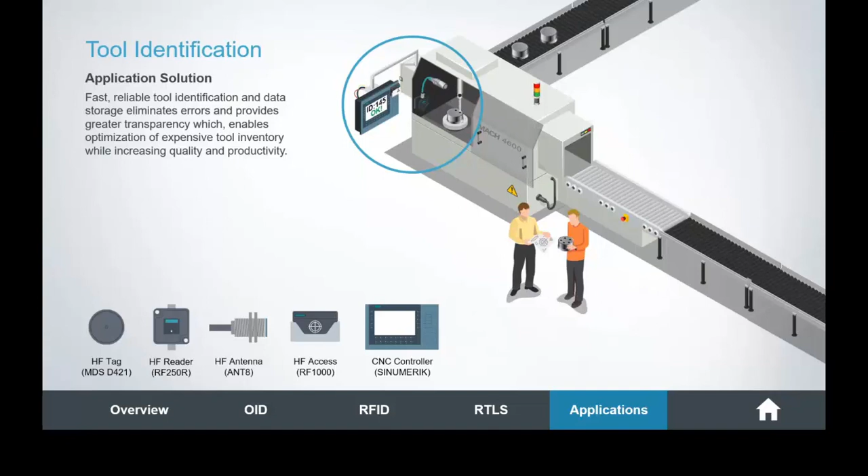Some tool identification - again we can use the barrel RFID 200 reader, so we can read the tool to make sure the right tool's gone in the right fixture. We use that for what we call change parts - if people are changing parts within a machine, we can make sure we've got the two parts that match before we actually start the machine, so the machine doesn't break down.

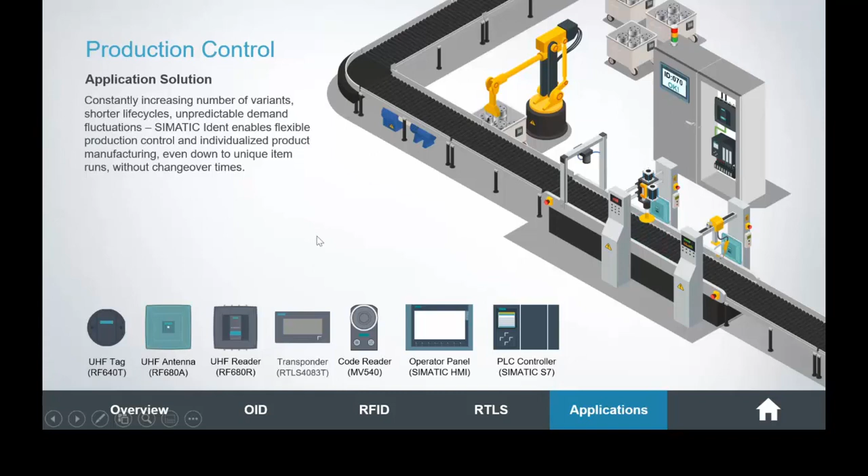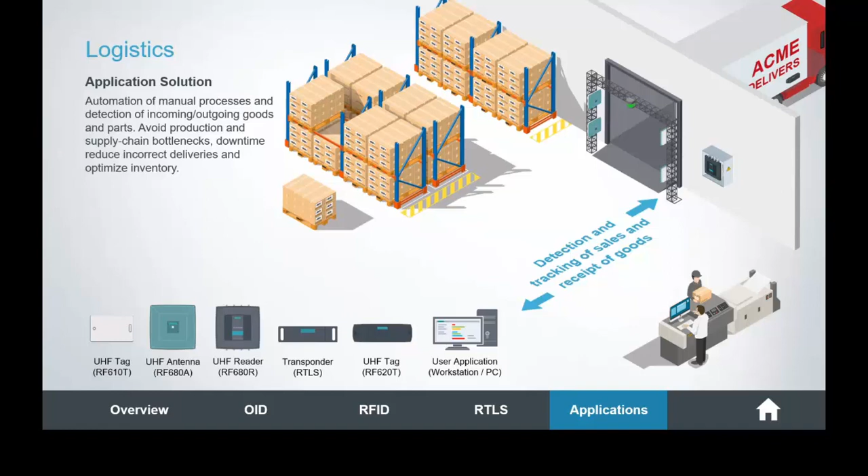Here's an RF600 application we've seen lots of inquiries for within logistics - what I call reading gates. Remember me explaining earlier, we have a reader with 4 antennas, 2 on the left, 2 on the right. We use this for loading bays, so literally we can do inbound and outbound logistics, where we can read all the boxes on the forks of a truck. We can do a quick goods receipt note when things arrive in a warehouse, using RFID instead of manual scanning. And when things get shipped onto the truck, we can do an outbound logistics check to get an accurate count of what's gone onto the truck.

And that's it with some - I think we're bang on 50 minutes. There you go, couldn't time it any better.